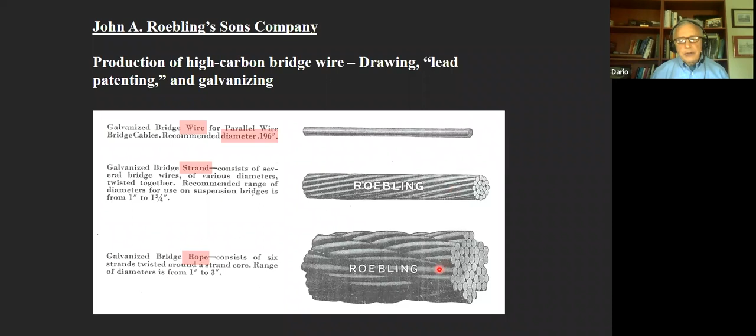This is a patent for a specific type of wire rope, filed in 1915, late in Charles Roebling's life, and only granted in the year of his death in 1918. Roebling's 80-ton wire rope machine has, of course, been designated a historic mechanical engineering landmark by the American Society of Mechanical Engineers.

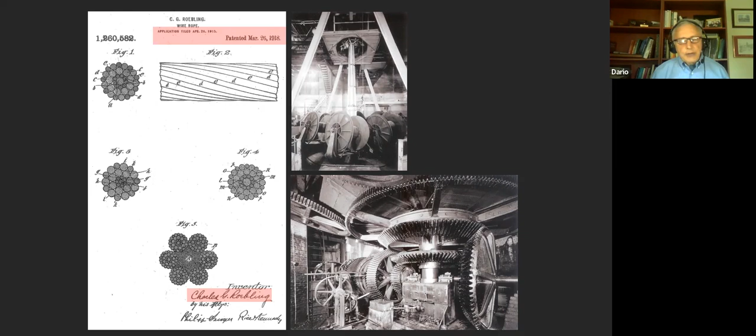In 1926, the year Washington Roebling died, the design of the George Washington Bridge over the Hudson River in New York City was being finalized. The principal design engineers were Othmar Ammann, chief engineer of the Port of New York Authority, Leon Moisseiff, advisory engineer on design for the Port Authority, and Allston Dana, appointed as engineer of design in charge of the design division. He had a staff of over 30 engineers and draftsmen working under him.

Both Dana and Moisseiff had previous experience in suspension bridge design, but this was Ammann's first suspension bridge. The final design had a main span of 3,500 feet and an upper deck with 7 traffic lanes. A second deck was added only later and did not have the 4 projected railroad lines. There were 4 main suspension cables, and each cable was 36 inches in diameter.

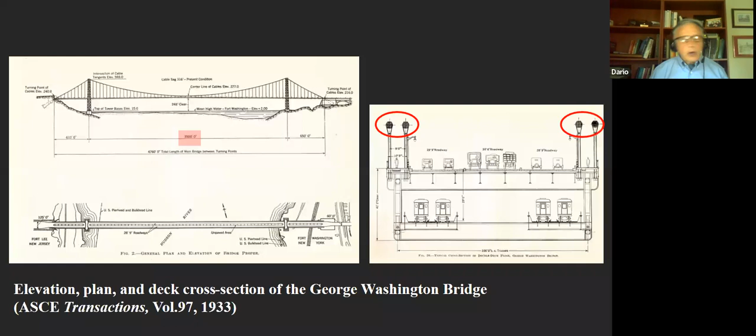Charles Sunderland was responsible for preparing Roebling's bid for supplying the wire and anchorage steel and for erecting the cables of the George Washington Bridge. Roebling won the contract with a bid of $12.2 million, which was about 40% of the total cost of the bridge proper. Sunderland was appointed Roebling's chief engineer for the execution of the George Washington Bridge contract.

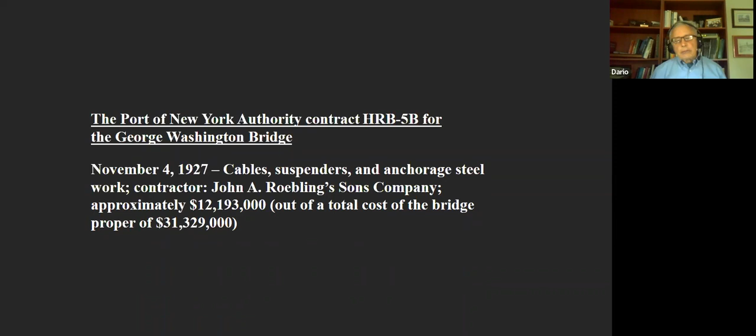The scale of the work that Roebling had to complete was unprecedented and daunting. This is a table prepared by Sunderland that compares the 6 largest existing suspension bridges with the George Washington Bridge. The most striking fact is that the George Washington Bridge was designed to have a main span of 3,500 feet, twice as long as the previous longest span, that of the Delaware River or Benjamin Franklin Bridge in Philadelphia.

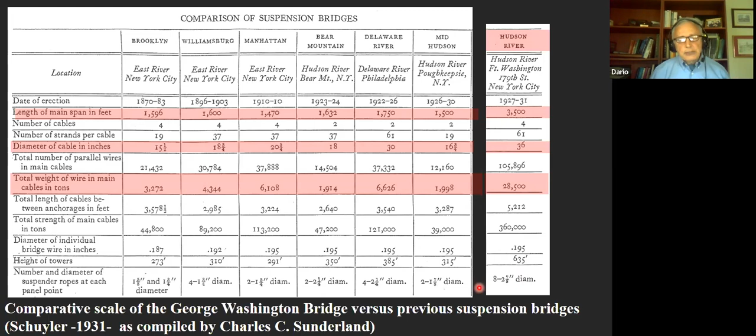The total weight of the wires of the main cables of the George Washington Bridge was 28,500 tons, greater than the combined weight of all of the cables of the 6 largest suspension bridges built to date. The suspender ropes had the largest diameter ever used in a suspension bridge. The ropes were sophisticated assemblies. The 2 7/8 inch diameter ropes had 283 wires of 10 different sizes. Wire ropes have an irreversible stretch from compaction when an applied load exceeds the tension used during manufacturing.

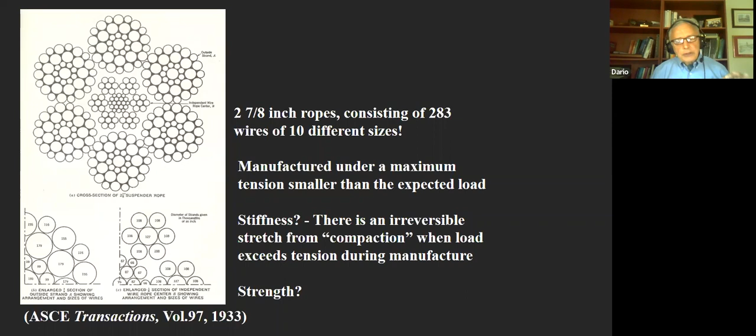This makes the elongations and the lengths of ropes under service forces uncertain. To eliminate this uncertainty, Sunderland designed and built a unique machine at Roebling's Kinkora plant. The machine, now called a prestretcher, consisted of...

a 1,875-foot long bed along the Delaware River with a 300-ton Riehle hydraulic testing machine at one end to measure force, and hydraulic cylinders with 5.5-foot strokes at the other end to apply the stretch. In effect, it was basically an 1,875-foot long testing machine to measure elongations of cables with known applied forces. Typically, forces equal to 125% of their expected service load were applied.

The moving end was a large sheave or pulley on a track so that ropes as long as 3,750 feet could be pre-stretched.

The operation of the pre-stretcher was very precise. A rope was stretched several times. One stretch was typically maintained overnight for over 10 hours, and length measurements were taken before sunrise to avoid temperature effects. The machine provided data from which tension versus elongation plots could be drawn.

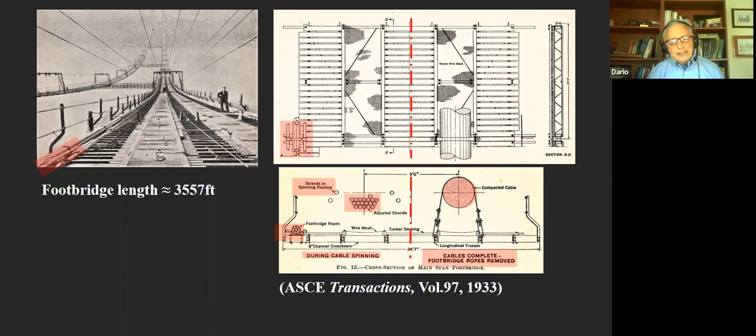Long wire lengths were obtained by splicing. Sunderland carried out rigorous testing to verify the capacity of wire splices. Almost 12,000 tests of splices were performed, which indicated that they on average developed 98% of the strength of the wire. Splices were made by deforming the ends of the wires and then pressing on or swaging 2.5-inch long sleeves, a quick, elegant, effective process devised by Roebling.

The suspension cable erection process, although it still used the spinning wheels conceived by John Roebling, was much more sophisticated in its control and rate of placement. Sunderland wrote chapter 24 of Schuyler's 1931 book on the Roeblings and listed 16 features that were developed specifically for the George Washington Bridge. Sunderland stated that they were, quote, the result of 2 years scientific and mechanical investigation in the laboratories of the Roebling Company, unquote.

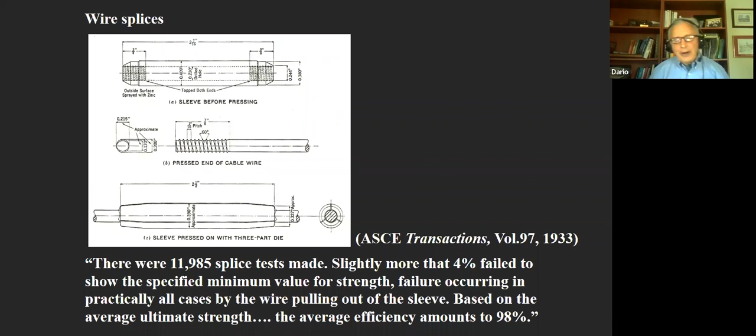After 434 wires were spun, they were combined into a strand, and each strand was precisely placed within a hexagonal pattern over the saddles. After all 61 strands for the cable were assembled, the cable was compacted into a circular shape and then wrapped with wire, just as John Roebling did in 1845.

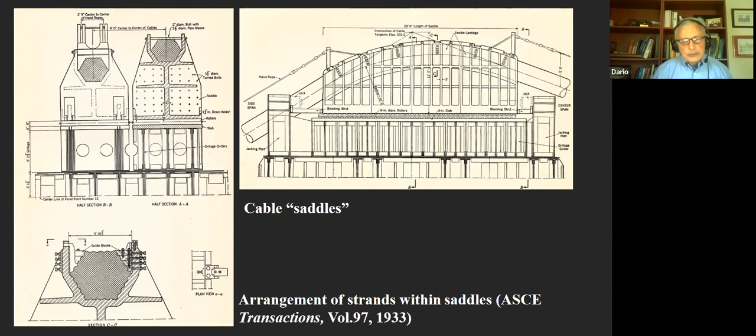The weight of the footbridges was then transferred to the main cables, and the wire ropes that supported the footbridges were repurposed to serve as the suspenders for the deck. Note that because of the known stiffness of the pre-stretched ropes, they could be cut to precise lengths, and simple, elegant, swaged connections could be used to support the floor girders. Adjustable turnbuckles were not needed.

Sunderland and his staff of Roebling engineers and iron workers achieved what was thought to be impossible.

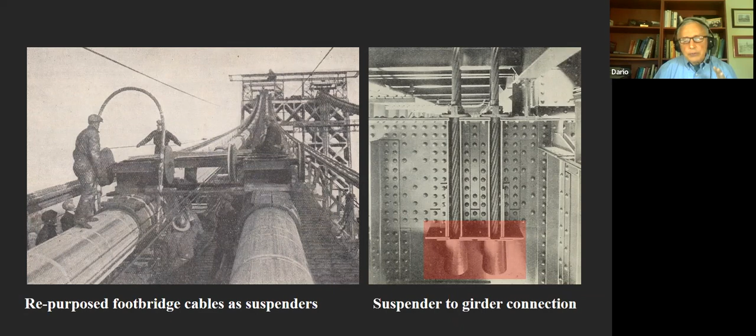Sunderland succinctly observed that the first set of cables was finished over 1 month ahead of contract, and at the same time, the second set was completed 13 months ahead of contract requirements. Roebling positioned 56.6 million pounds of bridge wire in about 10 months. With Sunderland's leadership, the Roebling Company achievement allowed the opening of the George Washington Bridge 8 months ahead of original schedule.

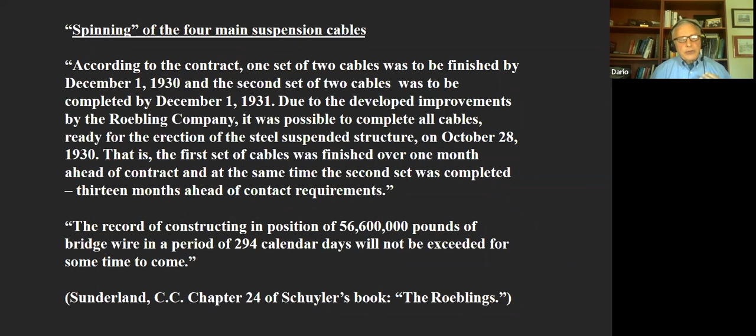Othmar Ammann, the chief engineer of the Port Authority of New York, wrote a letter to Sunderland stating his appreciation. It reads in part: 'I take the occasion to express to you on behalf of the engineering staff of the Port Authority its appreciation of the excellent and efficient manner in which you have carried out this unusual and important work, and in particular also the cooperation which you and your engineering staff have manifested throughout the period of construction.' This was truly effusive praise from the very reserved Swiss Ammann.

On the group photo of the Roebling staff shown at left, Sunderland is barely visible, standing next to the Roebling superintendent, Howard Hills. The availability of Sunderland's prestretcher at Kinkora had an immediate effect on the design of medium-span suspension bridges.

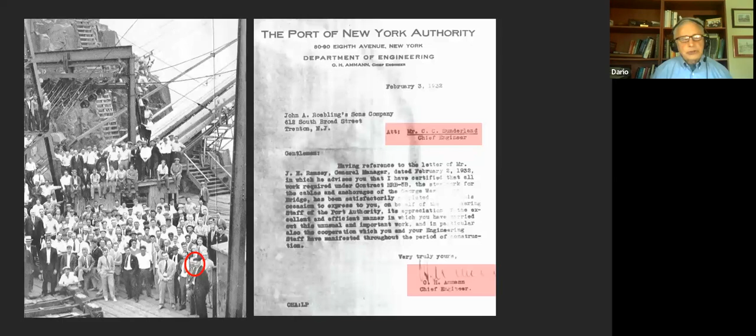The eminent bridge engineer David Steinman designed 2 medium-span bridges at the time the George Washington Bridge was being erected: the Grand'Mere Bridge in Quebec and the St. Johns Bridge in Oregon. Steinman realized that Roebling's ability to fabricate very long lengths of strand to a very precise length tolerance meant the main suspension cables could be formed by simply bundling pre-cut, pre-socketed Roebling strands, precluding the need for cable spinning. For the Grand'Mere Bridge, Steinman used 37 pre-stretched, shop-socketed Roebling bridge strands.

Each 1,680-foot strand had to meet a length tolerance of plus or minus a half an inch. For the St. Johns Bridge, Steinman used 91 bridge strands. Each 2,720-foot long strand had to meet a length tolerance of plus or minus 1 inch. Imagine building something that's 2,720 feet long to plus or minus 1 inch.

It's impossible. By the early 1930s, the Roebling Company not only manufactured unique wire ropes, strands, and end connections, but they also had the engineering and construction expertise to design and erect suspension bridges. However, Roebling leadership evidently elected not to compete with U.S. consulting engineers for U.S. commissions, because the consulting engineers were also potential customers for Roebling's manufactured products.

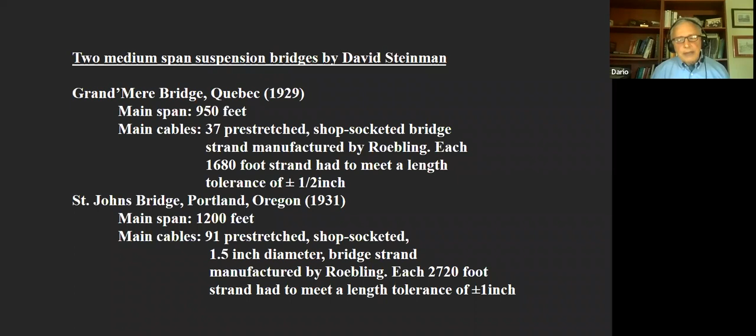Roebling did compete for commissions outside the US. One example is the San Rafael Bridge in the Dominican Republic. This bridge was designed and completely prefabricated in Trenton, New Jersey, and then erected by the Roebling Company under direct contract with the Dominican government.

Sunderland used 9 pre-stretched, pre-socketed bridge strands, but he did not bundle them and wrap them with wire like John Roebling did. Rather, he decided to leave them in an open, parallel arrangement, relying on the galvanizing of the individual wires for corrosion protection. Sunderland espoused this philosophy for subsequent medium-span suspension and other types of bridges.

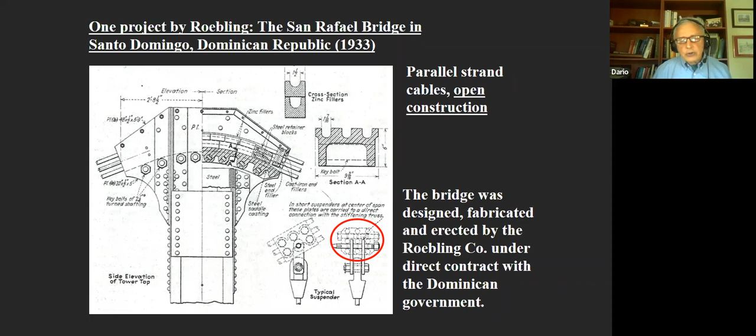Trenton, of course, is close to Princeton, New Jersey. This proximity naturally led to collaborations between Roebling engineers and structural engineering students and professors at Princeton. In 1930, at the time of the erection of the George Washington Bridge, a conference was held at Princeton to determine if physical models could be used for final design of a suspension bridge. It was attended by practically all the prominent US suspension bridge designers whom I've highlighted.

As usual, most of the work was done by a bright undergraduate student named Blair Birdsall under the direction of Professor George Beggs. In a photo, Charles Sunderland is in the front row, second from left. Birdsall is on the last row, third from left. Ammann also attended the conference, but as a Swiss, he chose not to be in a group photo, so I've added his image on the right-hand side. There's Ammann here. The main result was that from the experimental work it was feasible to use physical models to fully design a suspension bridge.

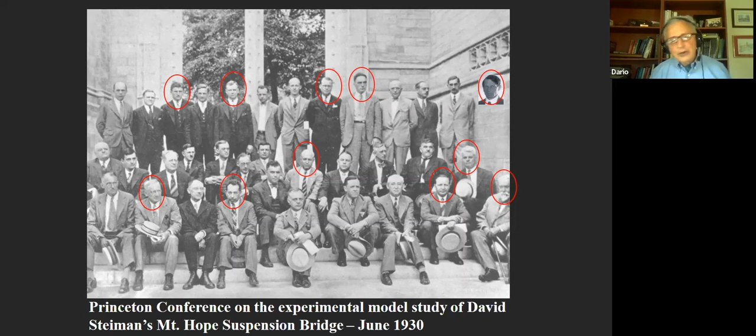But most importantly, Blair Birdsall joined the Roebling Company in 1934, bringing expertise and a disposition toward the use of physical models for design of innovative systems. Over an 18-year collaboration, Sunderland and Birdsall truly bonded as mentor and protege. It was Birdsall's great, extreme good fortune that Roebling won the contract to supply the wire and erect the main cables for the fabled Golden Gate Bridge, and that he was assigned to work on the erection of the cables.

Blair Birdsall noted that in preparation for work on the Golden Gate Bridge, Sunderland developed a much improved scheme for cable construction. This drawing compares the cable construction of the saddles of the George Washington Bridge. For the George Washington Bridge, Sunderland used uniformly sized strands with 434 wires layered horizontally with a hexagon side at the base of the saddle.

For the Golden Gate Bridge, Sunderland used strands of sizes varying from 256 wires to 472 wires. He stacked the strands vertically, in vertical columns with a hexagon apex at the base. The Golden Gate arrangement had two important advantages. Vertical stacking made the temperature of the strands much more uniform along the span. And both the vertical arrangement and the variation in strand size allowed a much more efficient compaction of the cable.

The George Washington Bridge cables have 22% voids, whereas the Golden Gate Bridge cables have only 17% voids. These advantages were significant, and the technology diffused internationally.

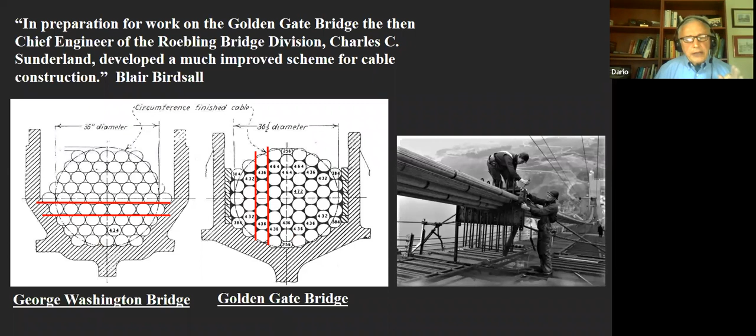Here are statements from two late 20th century prominent British and Japanese suspension bridge designers. All the major British suspension bridges have main cables that are of the built-in in situ parallel type pioneered in the USA by John A. Roebling, with the strands in a vertical rather than horizontal form. Dr. William C. Brown, Freeman Fox and Partners.

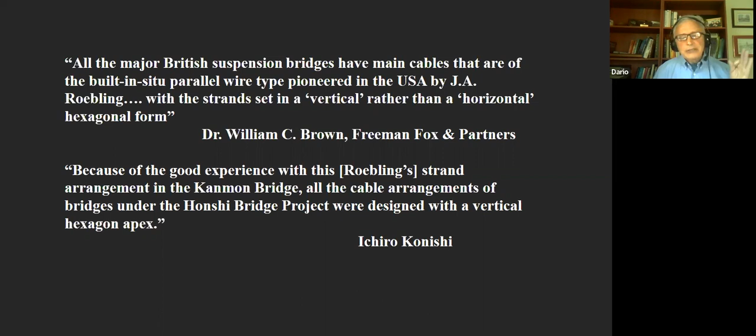Because of the good experience with Roebling's strand arrangement on the Kanmon Bridge, all the cable arrangements for the Honshu-Shikoku Bridge project were designed with a vertical hexagon apex. Ichiro Konishi. Most recently, the Çanakkale Bridge over the Dardanelles Strait in Turkey was formally dedicated about 3 weeks ago.

But after the euphoria of the great design and construction successes of the George Washington and Golden Gate bridges, American engineers received a blunt lesson. The Tacoma Narrows Bridge collapsed in a windstorm on November 7, 1940. The film of Galloping Gertie tearing itself apart has been seen by practically everyone. The failure occurred because design engineers did not understand the dynamic forces caused by wind, nor how to design a deck to limit dynamic responses.

Of course, several investigative bodies were formed. The most prominent was convened by the American Institute of Steel Construction and the Public Roads Administration. Sunderland and Birdsall were members, and the Roebling Company heavily subsidized the cost of board activities. But after December 7th, 1941, the nation was really focused on the war effort.

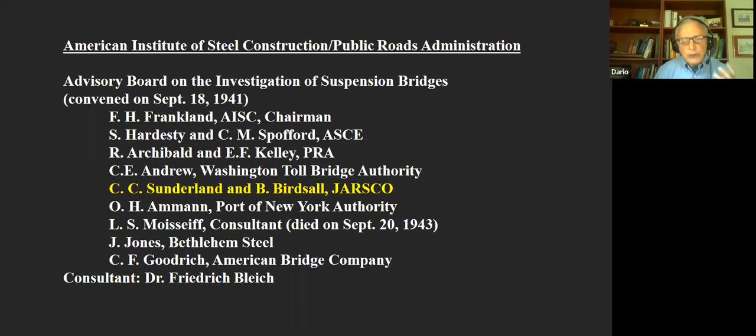In June 1944, Roebling received a contract from the US Army to design a suspension bridge of 600-foot span that could carry Army tanks. Because of the collapse of the Tacoma Narrows Bridge, Sunderland had already considered alternate ways of stiffening suspension bridges and had conceptualized a new form called the cable truss. The system devised by Sunderland did not rely on the bridge deck to augment the stiffness of a suspension bridge.

Rather, it was a truss-like system, but with all cable tension members. Its stiffness was increased by tensioning the bottom chord, which increased the tensile forces in the members and thus their stiffness. However, Sunderland's cable truss was very difficult to analyze mathematically.

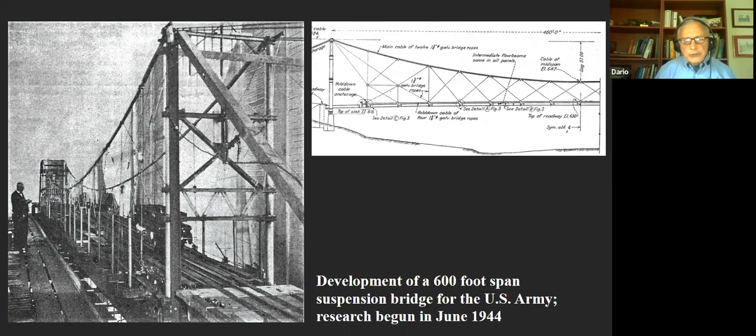Therefore, Birdsall and Sunderland built a 1/10 scale model and predicted the behavior and designed the bridge based on the behavior of this model. The image on the left shows model vehicles, presumably tanks or models of tanks, traversing the model bridge. Because the war ended before the research was completed, the US Army canceled the contract and a full-scale prototype bridge was never built in the United States.

In 1948, the Roebling Company won a contract to design and build a bridge over the Rio Lempa near the town of San Marcos in El Salvador. Sunderland and Birdsall decided to design, fabricate, and erect their first cable truss bridge. It was a 5-span bridge with a total length of 2,550 feet. The deck and longitudinal girder were very slender because they were not designed to increase stiffness.

The bridge was completely prefabricated in Trenton and shipped to El Salvador. Following Sunderland's philosophy, the top chord consisted of an open array of pre-stretched, pre-socketed galvanized bridge strands. The lower chord was also an open array of 8 strands, pre-tensioned to produce tension in the diagonals.

The right-hand drawing shows that the tension in the lower chord strands was equilibrated by placing the concrete deck in compression, an ingenious solution without precedent. The San Marcos Bridge was certainly one of the most innovative bridges built in the mid-20th century.

It was uniquely a Roebling achievement, with a design based on their experimental research, with Roebling wire strands and end connections, and with many unique Roebling steel forgings and castings. No other manufacturer or consulting engineering firm in the world had the breadth of engineering knowledge, manufacturing capabilities, and construction expertise to conceive and execute such a design.

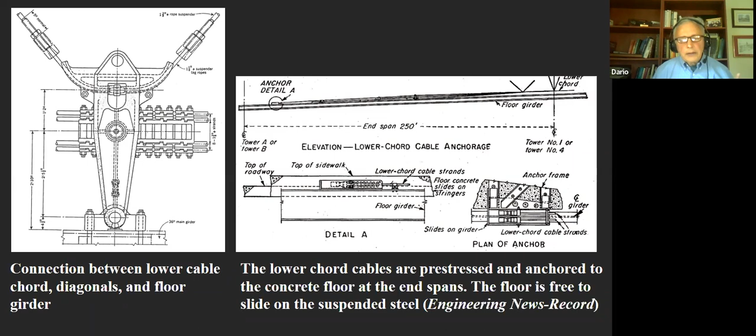This technology was pioneered in Europe, and the Europeans were ahead in this kind of technology. But Sunderland knew that his products were as good as any high-strength European product. Moreover, Roebling had unique experience with pre-stressing steel structures.

Therefore, following Sunderland's and Birdsall's traditional research methodology, they began by building a model structure. It was a 20-foot long model, proportioned to be a 1/10 scale model of a 200-foot long bridge. The model consisted of 5 4-foot long precast concrete sections post-tensioned together with 10 parabolic galvanized aircraft cables. The model was similar to beams proposed by 2 German researchers, Dischinger and Finsterwalder.

But Sunderland had a precise objective. They sought to determine if time-dependent strains in the concrete caused significant losses in the pre-stress forces and large increases in displacements under a constant load.

Measurements over 3 years indicated that a permanent state of pre-stress can be achieved with no measurable increases in displacements after the first year. With knowledge of such positive experimental results, Sunderland began using post-tension modular concrete floors on Roebling design bridges. The floor of Roebling's extant Lumberville pedestrian bridge over the Delaware River was precast using 4-foot by 9-foot modules. This was a very small job, but it was surely done as a marketing demonstration of the potential of pre-stressed concrete and the usefulness of Roebling products.

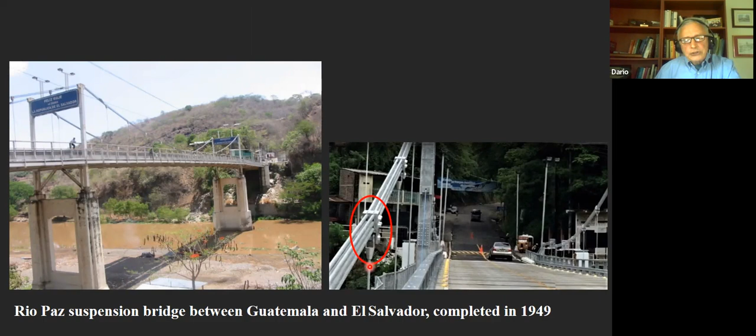The floor of the bridge was precast using 21-inch by 21 feet, 7-inch modules. The modules were then post-tensioned transversely and then post-tensioned longitudinally. The Rio Paz bridge is extant, but I don't know whether the deck is still the original one.

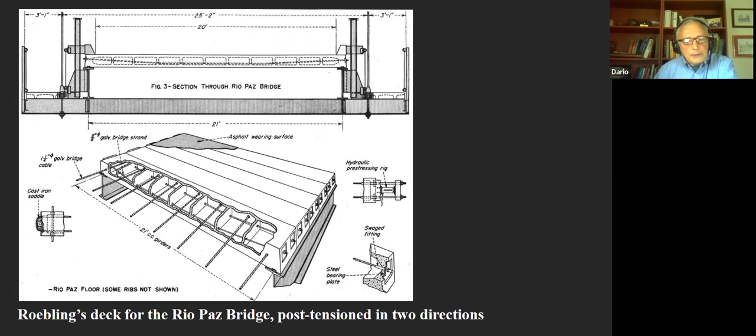The first great opportunity for Roebling to showcase its capabilities in pre-stressed concrete in the United States came from the city of Philadelphia, downriver from Trenton. The city needed to replace a bridge to carry Walnut Lane over Lincoln Drive and Monoshone Creek. After 2 bids exceeded the budget, the city in 1947 indicated a willingness to consider pre-stressed concrete bridge proposals.

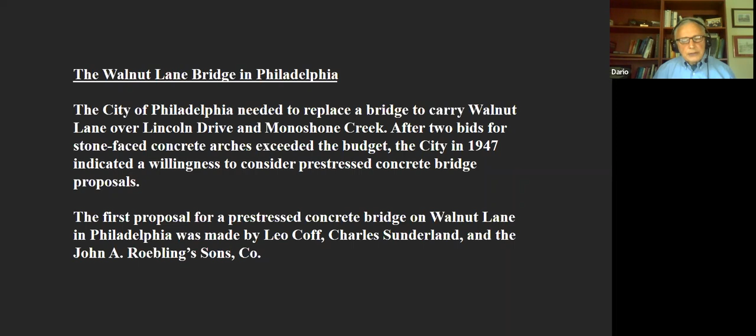It is an astonishingly advanced design that would be considered modern if built today. It features all of the Sunderland principles: post-tensioning, torsionally stiff box girders, large galvanized tendons, continuous tendons, unbonded tendons accessible for inspection, and compact swaged anchorages.

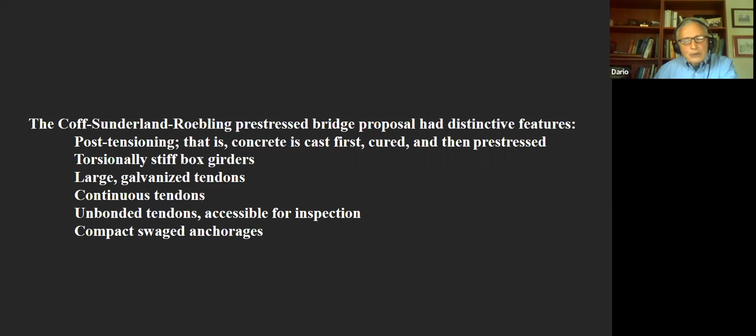Regrettably, the Coff-Sunderland-Roebling design was too advanced. The city of Philadelphia chose the design of Professor Gustave Magnel, a well-known Belgian pioneer of pre-stressed concrete, who had made a later proposal in April 1948.

Magnel, in fact, chose to use Roebling's high-strength, ungalvanized cold-drawn wire for the Walnut Lane Bridge, which was arguably better than any European product. Magnel's Walnut Lane Bridge opened to traffic on February 1st, 1951, and is traditionally considered the first pre-stressed concrete bridge in the United States.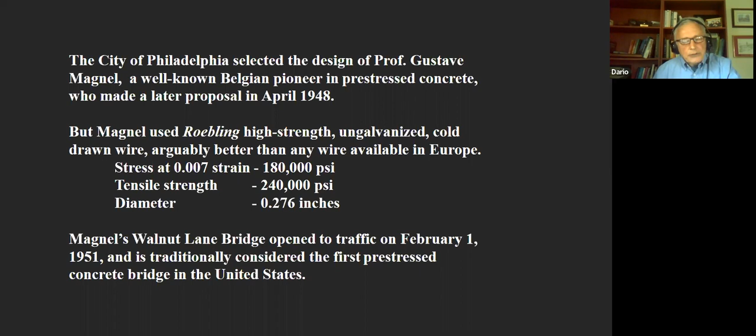Despite Sunderland's disappointment, Roebling's post-tensioning systems inspired several other pioneers of pre-stressed concrete. Ross Bryan in Tennessee and C.L. Johnson in Michigan built block bridges using Roebling post-tensioning products. These early bridges were built at the same time as the Walnut Lane Bridge, but received much less publicity and recognition.

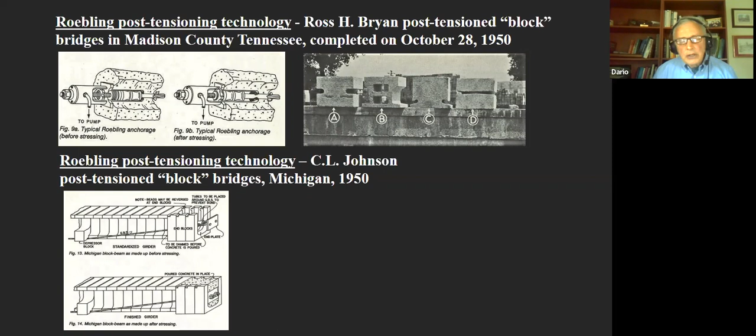The real fruition of Sunderland's vision of post-tension concrete bridges with unbonded, galvanized, accessible tendons was realized not in the US, but abroad in Cuba, shortly after his retirement in May 1952. 5 post-tension bridges were designed and built in Cuba using Roebling post-tensioning technology in collaboration with Luis Sáenz, Mario Suarez, and Jose Marti.

They are the Canas, Agabama, Arimao, Cuyaguateje, and Felipe Pazos bridges, built from 1952 to 1956. The Cuyaguateje Bridge had a main span of 300 feet with a variable box girder depth, which improved both the appearance and the structural efficiency.

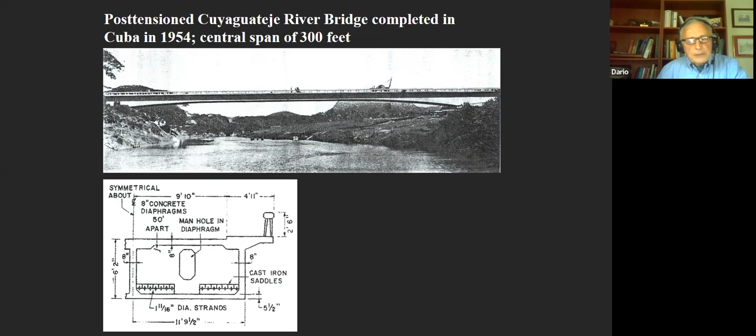In summary, Charles Sunderland, the John A. Roebling Sons Company, together with consulting engineer Leo Coff, developed a complete American concrete post-tensioning technology from 1944 to 1952. These included high-strength, large-diameter, galvanized and pre-stretched strands and ropes, compact swage anchorage systems, and box girder bridge designs with accessible, unbonded, large-diameter, continuous tendons. The extant post-tension bridges in Cuba are a strong vindication of the Sunderland Roebling Coff approach or philosophy of corrosion protection.

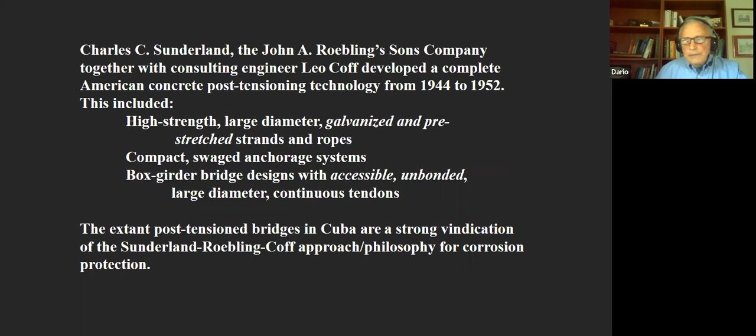Sunderland's legacy is perhaps best appreciated by his peers. These are a few testimonials to his character, vision, and engineering contributions.

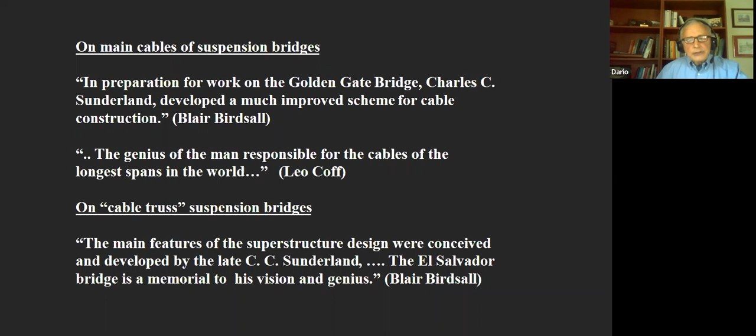On main cables of suspension bridges: In preparation for work on the Golden Gate Bridge, Charles C. Sunderland developed a much improved scheme for cable construction. The genius of the man responsible for the cable of the longest spans in the world, Leo Coff, on cable truss suspension bridges: The main features of the superstructure design were conceived and developed by the late C.C. Sunderland. The El Salvador Bridge is a memorial to his vision and genius.

On pre-stressed and post-tension concrete, it is understandable that the great Charles C. Sunderland would follow the example set by the Roeblings. Charles Zollman: Thanks to the vision of Mr. Sunderland, we started development work on adapting the principles of pre-stressed concrete to American practice in 1944. And by the time these principles became sufficiently recognized in this country to produce a market for wire, we were thoroughly entrenched as one of the recognized authorities in the field. Blair Birdsall:

Our only regret is that one of the grand pioneers, our former chief at the Roebling Company, boss Sonny Sunderland, cannot be present to view with satisfaction the fruits of his vision. Thank you very much.

Thank you, Lynn. Wow, that was so good. I was taking notes that whole time. And I'm so glad to hear that his nickname was Sonny Sunderland. I wanted to emphasize that, it's adorable.

That's fantastic. Yeah, I think one of the things that I deal with a lot, I've been giving tours at the museum and doing my own research, and we talk a lot about how the Roeblings built bridges, and your talk really gets at that question of what does it mean to build a bridge. Because they did so many different parts of building. They did engineering, they did the materials, and even the pre-stressed concrete ones, which is not normally what you think of when you hear Roebling—you think of suspension kind of stuff. They were involved with that too. It's really amazing. It was a unique firm that had manufacturing capability, engineering capability, as well as erection and construction capability.

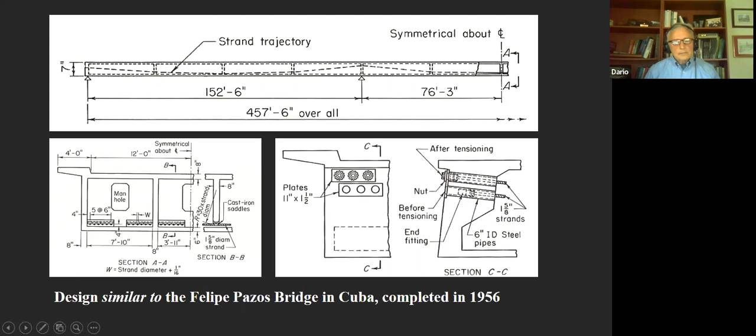So this was the pre-stretcher. It was from the 1800s. Am I addressing a question, Lynn? Yeah, about the tension on the wire rope—how did they put it on the rope and why did they put it there?

Okay, they pre-tensioned the rope with jacks. One end was fixed—the end that had the testing machine. The other end had hydraulic cylinders, and these cylinders retracted, putting the rope in tension. The reason they did this is that wire rope, when you make it, the wires are relatively loose, so when you stretch it, they compact, and therefore the stiffness is much smaller when they compact. You don't know the length of these ropes if you want to use them in an application, so by pre-stretching, they eliminated this irreversible stretch from compaction, and they created a product that had consistent stiffness and known length. I don't know if that explained things.

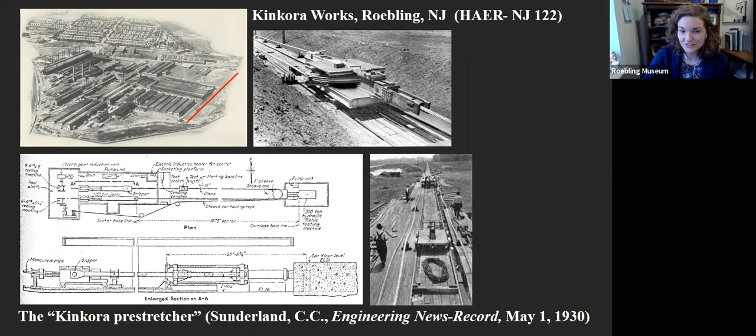There's a question from one of our docents at the museum. As a docent, what would be the best way to describe what the pre-stretcher did to visitors who haven't seen this lecture? I've heard some folks at the museum describe it like a t-shirt that's pre-shrunk—the people who buy it know it's already shrunk as much as it's going to shrink, so there are no surprises. Is that accurate? That's a valid analogy, but in reverse.

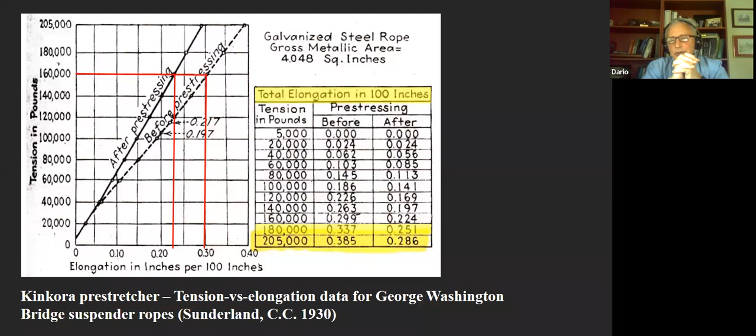A t-shirt shrinks, but a cable expands—as you pull it, there's an irreversible stretch. If something was a foot long, you'd stretch it and it would keep that stretch the first time, but after that, any additional stretch would go back to the original length. So it's the reverse of the shrinkage process for a t-shirt. I'd have to think about it more, and maybe give you a better analogy for your visitors.

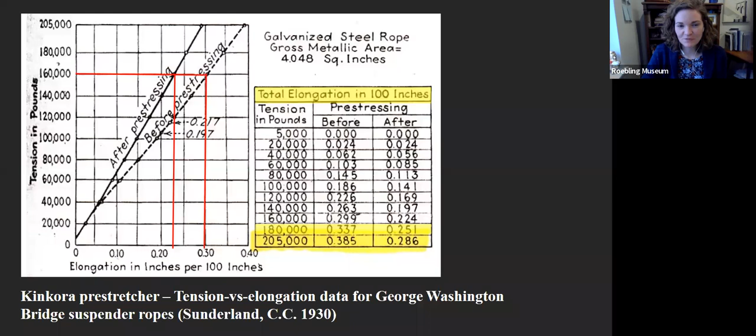We'd love that. Another question coming in is what is left of the buildings and machinery on site. I can speak to this a bit because I've seen them, and there are really good pictures.

We affectionately refer to them as buildings 92 and 93, the two pre-stretcher buildings, which are still in place right now where they originally were. But we believe the EPA has some plans to maybe get rid of them or move the actual machinery off that location.

If you come to the museum, there's the Delaware River Heritage Trail that goes along the Delaware River, and you can walk right up next to the two buildings. I was talking to Dario about this earlier this week—the buildings reflect the length of the wire, and the distance between the two buildings and the pieces of machinery really tell the story of how long the cables were at the time. I recommend coming to the museum, but also taking a walk on the river trail. You can't get inside the buildings, but you can definitely see them and get pretty close.

I think the length, which was determined by the length of the footbridges on the George Washington Bridge, is an inherent aspect of the machine. It's the scale and length of the machine that really defines it. Agreed.

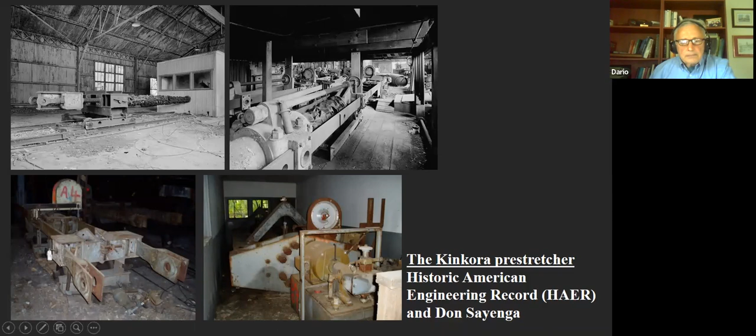It was destroyed by guerrillas in a civil war in 1982. Wow, they blew up the entire bridge, so it doesn't exist anymore as a bridge. This was unique in the world—something so uniquely Roebling was destroyed in a civil war in 1982. Wow, that's really amazing.

We do have a question: while we're talking about specific bridges, isn't the Lumberville Bridge an experiment in a cable-stiffened bridge? Yes, as well as a prestressed concrete deck. Correct. I see, I sense an engineer in the audience. It's very easy to sense them.

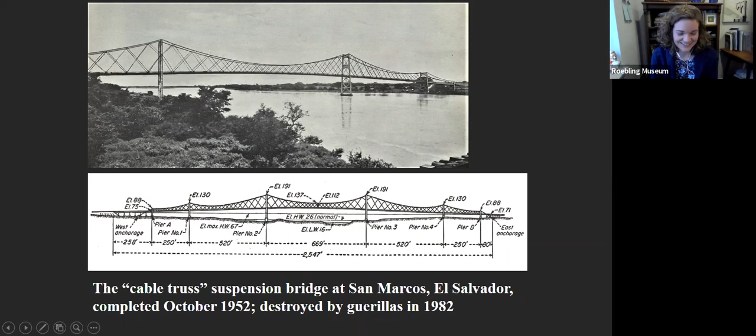Okay, we do have another one here. I can answer if you... Yep. Yes, okay, go ahead. So yes, it was both an experiment in pre-tensioning of cables, as well as post-tensioning concrete.

It was kind of a precursor to the San Marcos Bridge. This design was refined, really, that led eventually to the San Marcos Bridge. But you're right, it was a pre-stressed suspension structure, both in steel and in concrete. This was only achievable by Roebling. This deck does not exist anymore—it was replaced by PennDOT with something else. But the original deck was a demonstration of post-tensioned concrete, and the Lumberville Bridge is a demonstration of a pre-stressed, cable-stiffened suspension bridge structure.

Sounds like that one's not too far away from the museum. I might have to go visit.

Another question: excellent talk, Dario, I hope you turn it into an article or book. You do have an article about this, right? I have two separate articles that appeared in conferences, and they're both available as PDF files. And as you know, I have a YouTube video—I've modified this talk, but the YouTube video has essentially many of the same points, so you can look at that and go over the talk again.

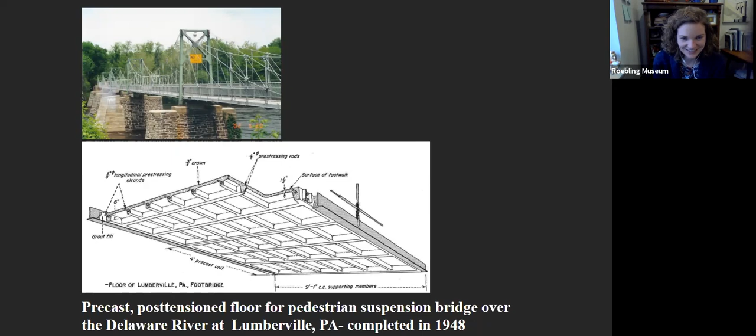Well, that's not actually his question. His question is, can you talk a little bit about the small 1943 cable truss bridge that still exists at the Roebling Trenton plant? I detect Stephen Buonapane here. Close, Clifford Zink. Oh, Clifford Zink, yeah. That was also an experiment.

There were basically two ways to stiffen a suspension structure before the development by Charles Sunderland of a cable truss. One was to provide stiffness with a stiff deck, and the other was to stiffen the actual pair of suspension cables that suspended the walk structure. That kind of design had been used before—there were many designs using a so-called stiff cable design for suspension bridges. One was built in Pittsburgh, one in St. Louis. So there was nothing really exceptional about that design, except that it did not need a stiff deck. The deck could be very, very slender, and all of the stiffness was provided by making a truss, or an inverted arch, out of the suspension cables, Clifford.

Does that answer your question? It seems like it does. Okay, let's see. Here's a question that I've had.

If you stretch the wire too much, does it snap? Have they found a way to prevent the snapping? No, that's the nature of wire. Nothing is more dangerous than a wire breaking or a rope breaking.

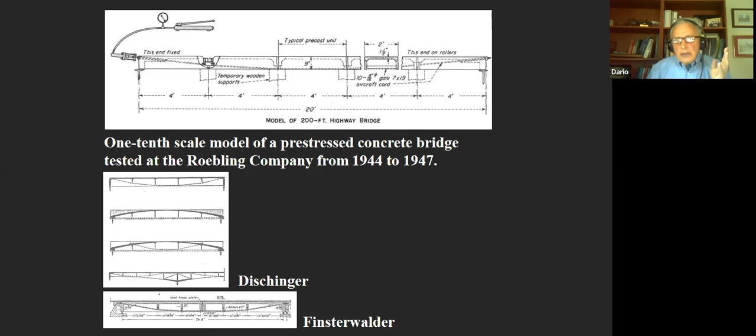It's an occurrence that happens sometimes in post-tensioned concrete in the United States, and when it happens, there's a danger of death and severe damage. If one of these pre-stretcher ropes broke, that would have been simply catastrophic—it would have caused an incredible amount of damage. Because of the energy stored in the rope, it's like stretching a rubber band, but a huge rope stores much, much more energy. If a rubber band breaks, it hurts your fingers; if the rope broke, it would have taken down and leveled both buildings.

The force used to pre-tension the ropes was way less than the capacity of the rope. They typically used 300 tons, which is 600,000 pounds, and the capacity of those ropes was at least twice that, 1.3 million pounds. So that's one of the most dangerous, catastrophic events in construction—the breaking of a cable or rope. Everyone kept their proper distance when these small ropes were tested in the 2.5 million pound machine, because when they broke, they shook the building and gave a loud bang. I don't think there's a way of providing ductility in these wires that would allow a slow rupture like may occur in other materials.

We've been working on an exhibit that really features the worker stories, and everywhere you look at these wire, rope, and steel mills, there is danger. This sounds like one of the most dangerous areas—you don't want to get near this experiment. I would say keep 10, 20, 30 feet away. Obviously, if they broke a rope on the pre-stretcher, it would have been catastrophic.

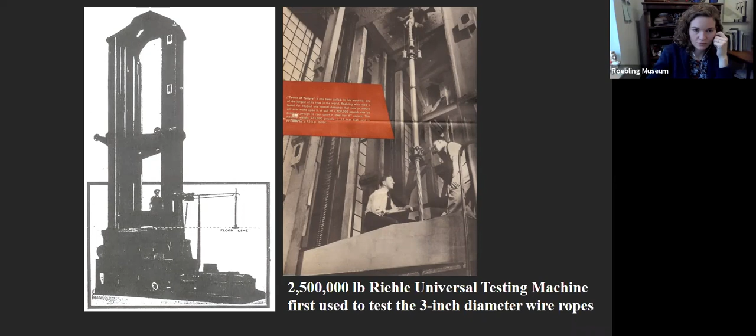My own judgment is this was a tragic direction that we took. The reason was that it allowed for manufacturing of products. The post-tension product is ad hoc, meaning you design it for one specific usage, whereas you could pre-manufacture pieces of pre-stressed concrete, cut them to size, ship them to the site, and erect them. So I think it was the ease of construction and prefabrication that caused the American pre-stressed concrete industry to go into the pre-tensioning direction rather than post-tensioning.

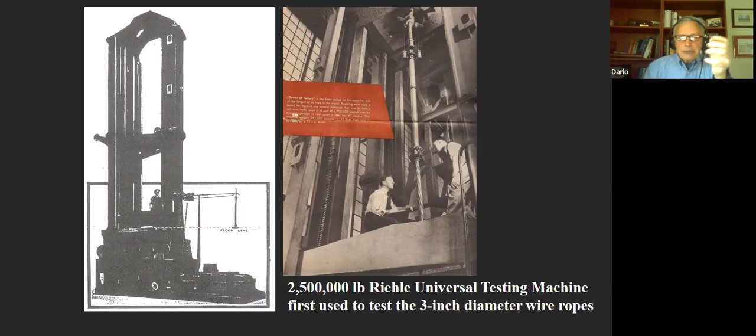But trust me, if this bridge was designed today, it would be considered state of the art, because that's the direction people are going in—post-tension with open tendons. For very large bridges especially, almost all have been built with post-tensioned open cables or open strands, for inspection and corrosion protection. So to reiterate, the direction he took was based on ease of production, ease of making individual parts that could be shipped to the site and erected there.

But in terms of modern large-scale construction, this is the direction that Sunderland defined, and this is the direction currently being taken for very large projects. If you're interested, one of the large projects is the Confederation Bridge between the provinces of New Brunswick and Prince Edward Island. This was all constructed using post-tension construction with open ducts.

That's really interesting. Yeah, sorry, I was muted. I was talking, but you couldn't hear me. No, continue this, if you have something.

That bridge, if it were built now in Philadelphia at the same spot, would be considered state of the art. The design—this is a personal opinion, so don't quote me on it—the design they chose was a regressive European design that did not perform very well. They had to replace the Walnut Lane Bridge in the 1980s because of corrosion, so it was really not a progressive design. I really meant it when I said Sunderland's design was too advanced. The city of Philadelphia did not accept this too-advanced American design versus the European traditional design.